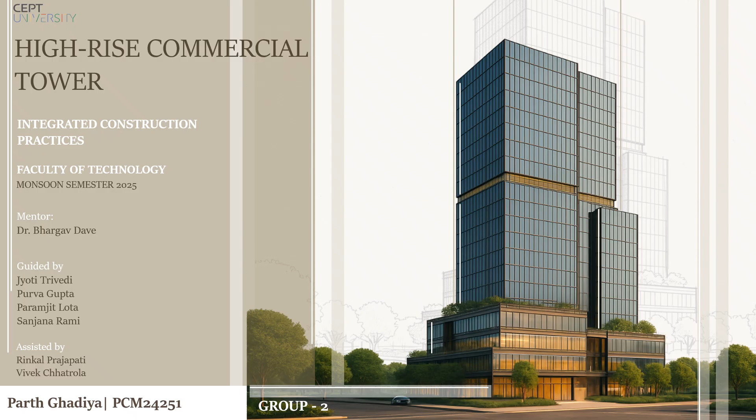In this studio, I worked on a high-rise commercial tower project located in GIFT City. The project allowed me to explore BIM coordination, clash detection, and on-site process planning. In this video, I will talk through the project brief, clash detection workflow, resolution process, and the Last Planner System implementation on the site.

Moving towards the project brief: this commercial tower is a 29-story building with 3 basements, built as a greenfield development. The project has a land area of 5,970 square meters and total built-up area of around 66,600 square meters. The contract type is item rate and the total construction cost is approximately 160 crores. The project duration is 42 months, from November 2023 to July 2027.

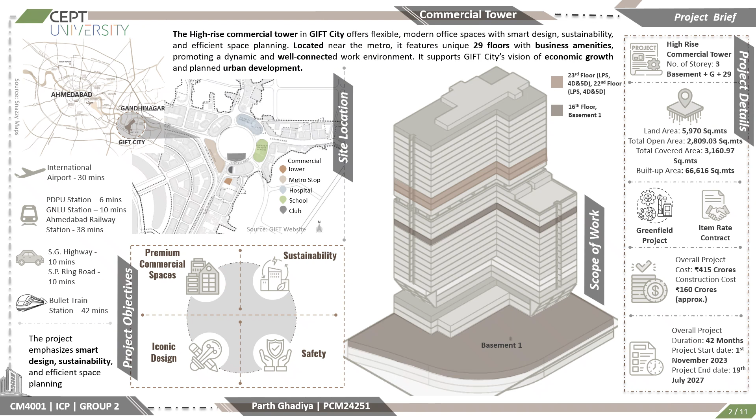The objective of this project is to create sustainable, smart, and efficient commercial spaces with strong connectivity to metro and public transport. Scope of work for this studio is basement 1 and the 16th floor, and for the Last Planner System 4D and 5D simulation, we took the 23rd floor.

Moving to clash detection - one of the key parts of the studio. This process flow shows clash detection in Navisworks: integrating all models in Revit, exporting to NWC format, importing into Navisworks, running clash detection tests, applying rules, and generating reports. We integrated architectural, structural, mechanical, electrical, plumbing, and fire models into Revit and exported them into Navisworks.

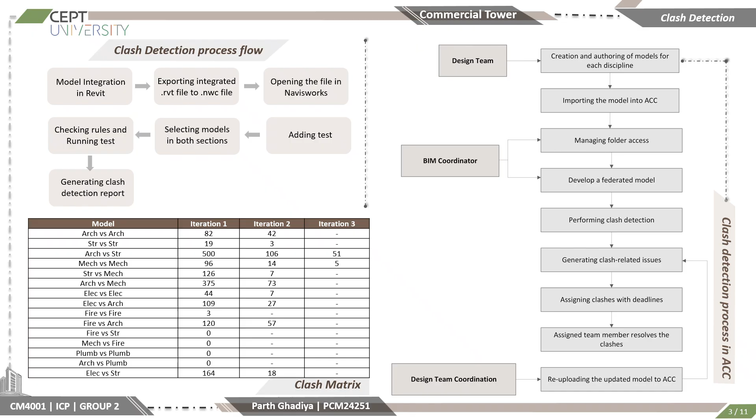Similarly, we also did clash detection in Autodesk Construction Cloud. This is the process flow of clash detection in Autodesk Construction Cloud. This clash matrix shows the number of clashes detected in each iteration, starting from major conflicts between architecture and structure to the MEPF systems. This helps us understand how model refinement reduces clashes across all iterations.

As mentioned earlier, we did clash detection in both Navisworks and Autodesk Construction Cloud, so this is a comparison between both software. Navisworks offers advanced and detailed clash detection, best suited for deep MEP and BIM coordination. On the other hand, Autodesk Construction Cloud provides cloud-based accessibility, automated clash detection, and real-time collaboration. This comparison helped me understand which platform is more efficient at different project phases and for different stakeholders.

Moving to the clash detection resolution process flow: integrate all models in Revit, export to NWC format, import into Navisworks, run clash tests, apply rules, and generate reports. After identifying the clashes, assign each relevant clash to the respective discipline. This systematic workflow helped me identify errors in the early stages and improve the interdependency of coordination, and taught me how clash detection fits into real-world BIM execution planning.

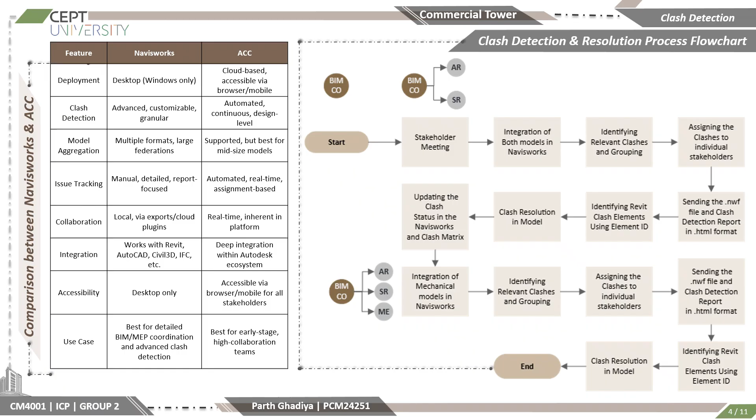Moving towards clash resolution - here we can see examples of actual clashes identified in the model. Majority of clashes were modeling errors such as column-slab clashes and wall intersections, and very few were design clashes such as duct and pipe intersections on the 16th floor and duct and column intersections at basement 1. We analyzed these clashes and gave proper spacing between column and duct to resolve these design errors.

Similarly, each clash was analyzed and resolved by adjusting modeling elements or correcting design inaccuracies. This hands-on exercise strengthened my understanding of BIM accuracy and coordination between structural, architecture, and MEP teams.

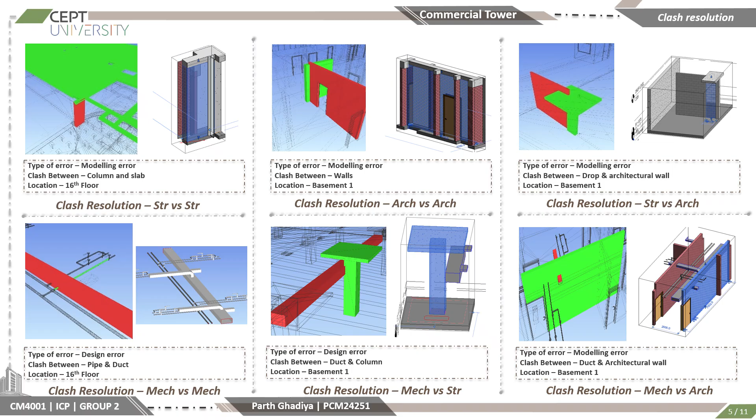These are additional clash resolution clashes, including cable tray conflicts with walls and columns, conduit overlapping, firefighting system clashes, and electrical design errors. Each clash was categorized as either a modeling error or a design error. Resolving this improved overall quality of the model, giving us a clash-free model and reducing the possibility of on-site rework.

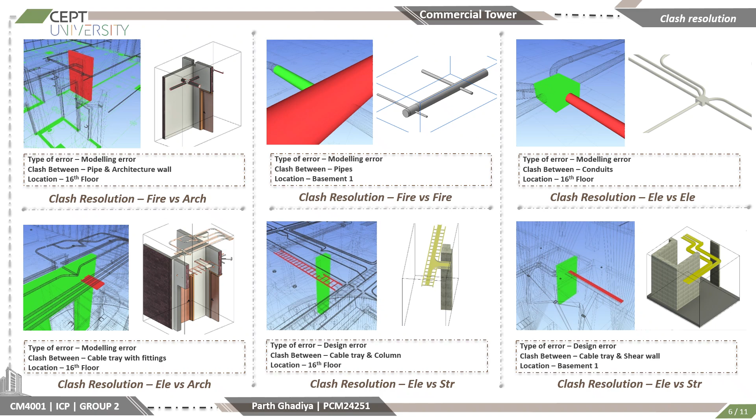Moving towards Last Planner System implementation on site - the second major task was implementing the Last Planner System on site. Last Planner System aims to improve schedule reliability by planning work in weekly cycles, identifying constraints, and measuring actual progress. In starting, we have a master schedule or milestone schedule.

After that, we prepare the phase schedule and make-ready schedule. Out of that, we prepare the weekly look-ahead planning for the week. After that, tracking each activity during the whole week, finding constraints, and calculating percentage plan complete. We prepared the look-ahead plan for 3 weeks based on our site process and constraints observed during site visits.

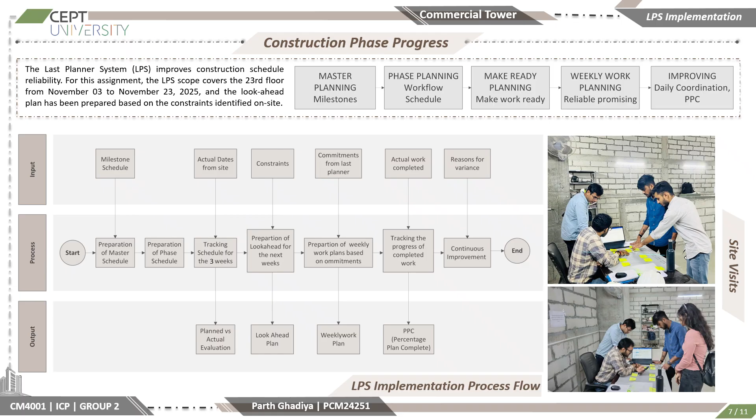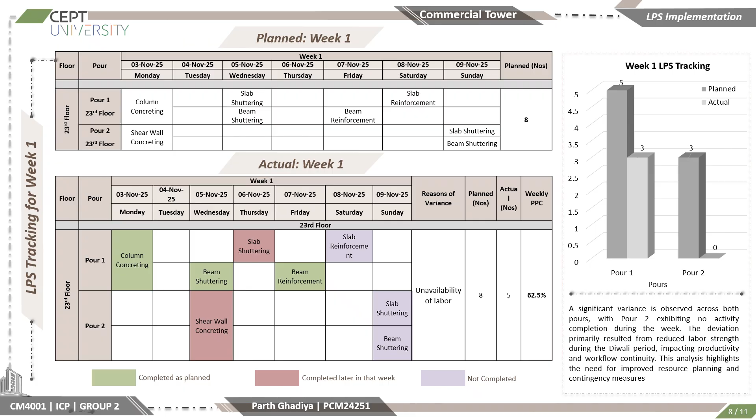In week 1, labor shortage during Diwali caused delay. Out of 8 activities, 3 were completed as planned, 2 were completed within the week but not on the planned date, and 3 were not completed - so 5 activities were completed that week. We achieved a percentage plan complete of 62.5%, with the main cause being labor shortage during Diwali.

Moving towards the Last Planner System for week 2 - we clearly see that 6 activities were planned for the week in the look-ahead table. While tracking week 2, we identified that crane unavailability affected progress. 4 activities were completed on the same day as planned, 1 activity was completed later that week, and 1 activity was not completed, giving a percentage plan complete of 83.3%.

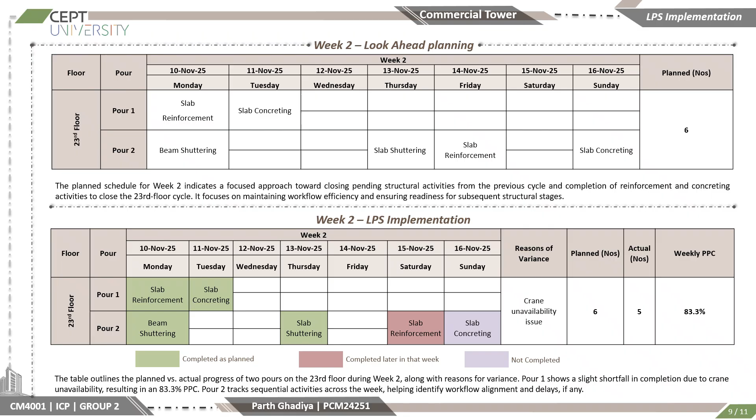Moving to the look-ahead planning for week 3 - week 3 focuses on starting activities of the 24th floor cycle, including column reinforcement, shuttering work, shear wall works, and slab concreting. A total of 7 activities were planned to be completed in week 3. Through this process, I learned how workflow reliability, resource planning, and sequencing impact the actual process.

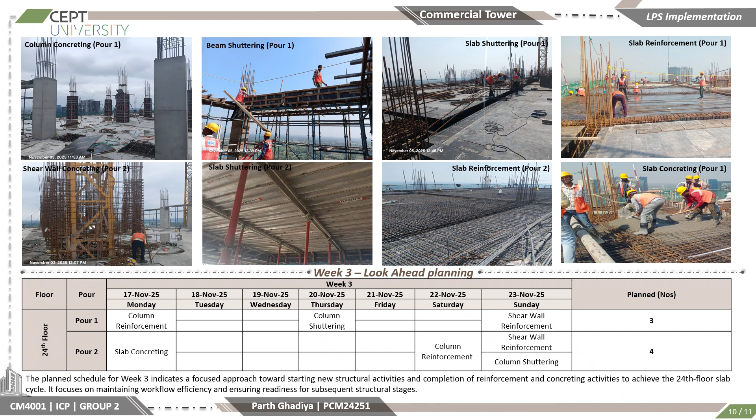To conclude, this studio helped me understand how digital coordination and on-site workflow are interconnected. Clash detection improved the accuracy of BIM models and strengthened coordination between all disciplines. The Last Planner System improved planning discipline, highlighted variance, and improved my understanding of production control and percentage plan complete. Overall, this studio gave me hands-on experience combining BIM tools, planning methods, and real site conditions to improve construction predictability and efficiency.